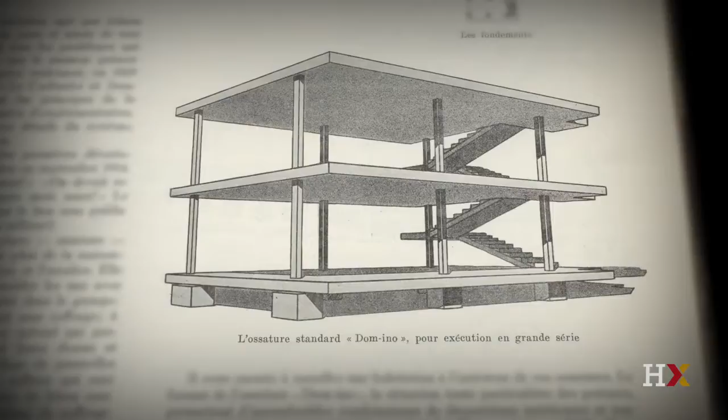It's a diagram that is not yet bound by room layout or any kind of decorative trim. Actually, it doesn't even have an enclosure yet. The walls, the elevations are not on. It's all plan and all section. Nevertheless, the domino would be understood as a kind of primitive hut of the modern.

As I say, the domino is all plan and section, no elevational surfaces, no wrapper. It's proper to understand it really as an emblem as much as a building, a diagram of a new technological and constructional paradigm of mass production, standardization, repetition, and so forth. It's really a prototype of the potential of the new technology of reinforced concrete, glass, and steel. But this diagram, with its sort of concentrated energy of slab, column, circulation, and base, contains a lot of implication that Le Corbusier will explore for the next several decades in his houses.

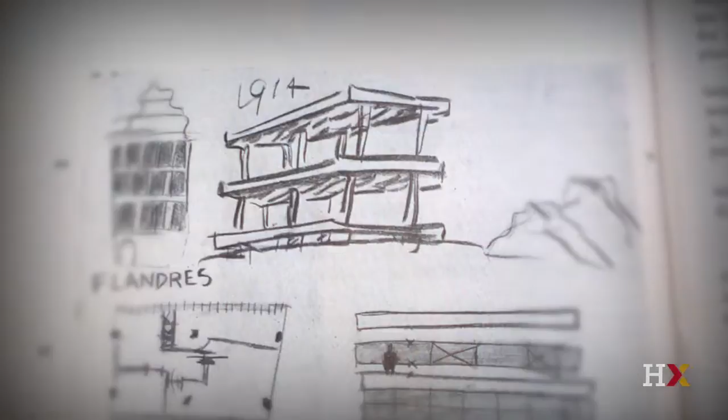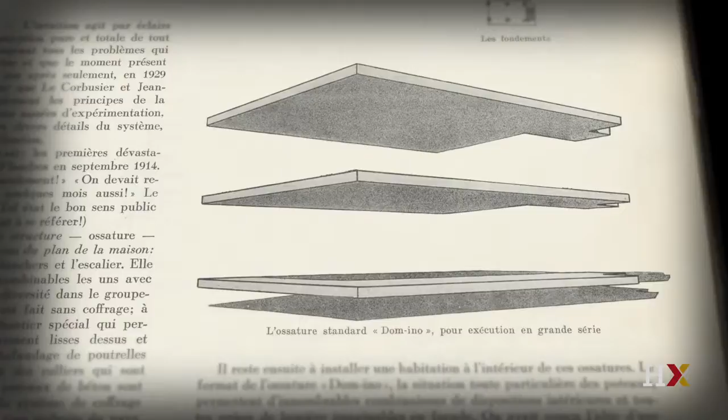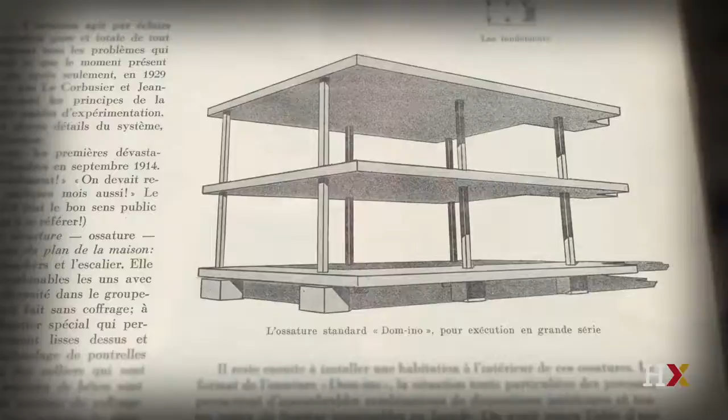So let us look at the domino in some detail. The diagram comprises three horizontal slabs. The first floor slab is on six box-like footings that raise it slightly above the ground. The columns that seem to go through the slabs hold up the next two slabs. It's really initially to be read as a kind of constructional integer, a constructional unit that would be the basis for any building. Let's look at it in more detail.

The columns are set back from the long side of the slab, and yet they're very, very close to the short sides of the slab. This makes a clear differentiation between front and side. We should remember this because it'll become very important when we see how Le Corbusier develops that.

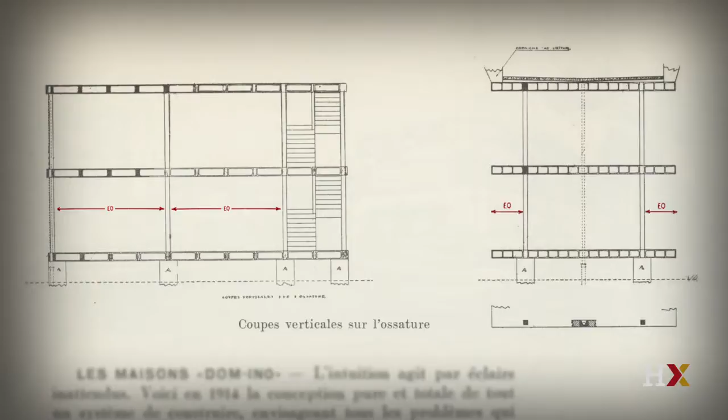The columns also mark off equal bays. There's a kind of rhythm, there's a rigor, there's a mathematical underpinning to the spacing of the columns, and there's actually a proportional relationship between the bays. The footings emphasize the building's relation to the ground. It's neither buried in the ground, nor is it yet suspended from the ground. It's just pulled up so that there's a distinction between the slab and the earth.

The domino is an example of what Le Corbusier called an objet type, or a typal object, or an object type. In his early sketches and essay, Le Corbusier celebrates the grain silos in North America, these big cylindrical storage containers, along with automobiles, ocean liners, and other accessories of the machine age that he saw as the materialization of pure form. It was in part the volume of these objets types that was important for him, but also the fact that they had been refined over time, that they had become pure forms or these figural volumes through an evolution of use and production.

In his paintings, too, ordinary objects of daily life like glasses and plates or pipes and bottles, guitars and pianos, these appeared to him intensely interesting, first and foremost because of their simple shape, their contour. He thought that volumes viewed in light, even simple everyday objects that were volumetric figures viewed in light, could trigger deep, fundamental sensations and affects.